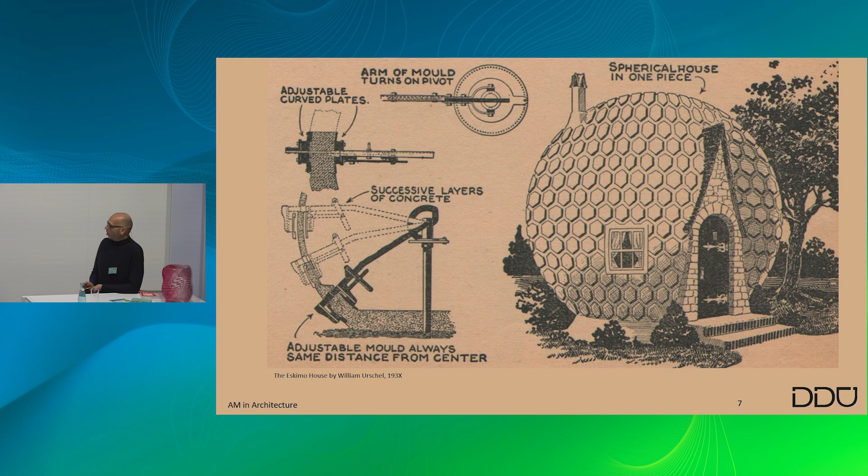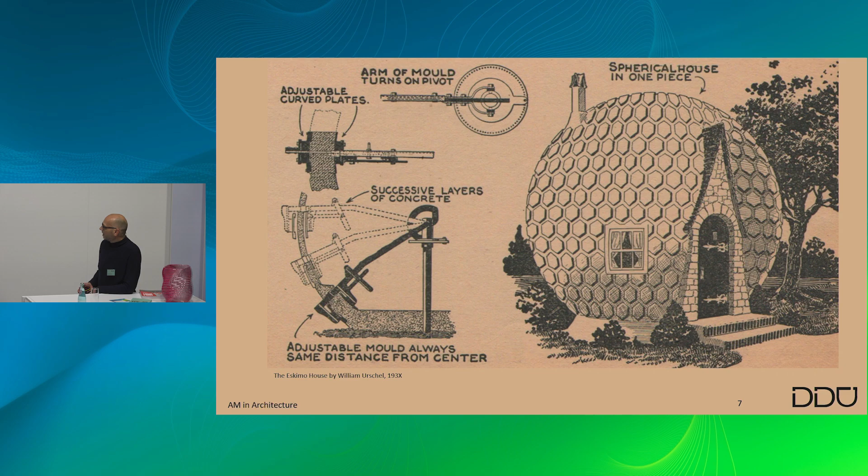If we think about 3D printing, it mostly appears to be a completely new topic, but you find precedents already in the 1930s. William Urschel suggested printing what he calls an Eskimo house with a 3D printing method, and they actually prototyped that. There's a bit of manual labor involved here, as you can see, but the process reminds of current technologies in the built environment.

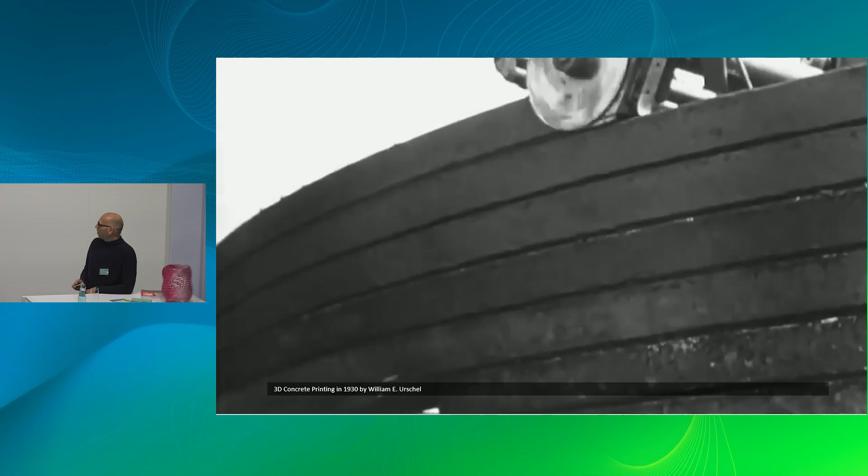It didn't take off in the 1930s, and it didn't take off in the 1990s when Behrokh Khoshnevis filed his first patent on what he calls contour crafting. When I saw these images, I thought: building a 3D printer that is larger than the house you want to print—does that really make so much sense? We will see that it actually happens these days.

It didn't happen in the 1990s, it didn't happen in the early 2000s, and in our book we explore why it happens now. We use this slightly cheesy quote from Victor Hugo: 'You cannot resist an idea whose time has come.' What we mean is that turning ideas into successful and maybe even disruptive technologies is an extremely context-sensitive process. So place, time, resources, and parallel innovation in adjacent fields need to fall together to ignite such an innovation. If we look at additive manufacturing and architecture, it's the digital design, the 3D modeling, the parametric modeling that needs to come first.

So instead of drawing buildings, you 3D model them. This is then, in a digital process chain, transformed into the movement data, into the G-code for the printer. So there's a digital continuity from ideation to fabrication. You need to have the machines, and for large-scale elements in architecture, you need robots to increase the reach for building large-scale elements, and you also need innovation in material.

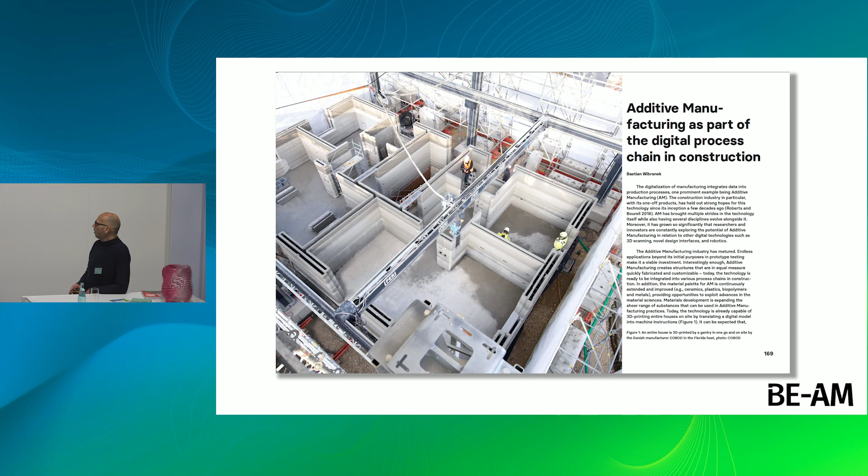If you look at this gantry system, it's not such a big technical infrastructure to make it happen. What's the result? A very conventional multifamily house. So we could now discuss what else is possible if we 3D print architecture, but this was not the question for this project.

Here, Peri asked: what happens if we 3D print a house? Do we get permission from the authorities to print it? Can we interface the 3D print with all the other elements that need to go into a building, like a window, like the plumbing, electricity? This is what they explored in this project successfully.

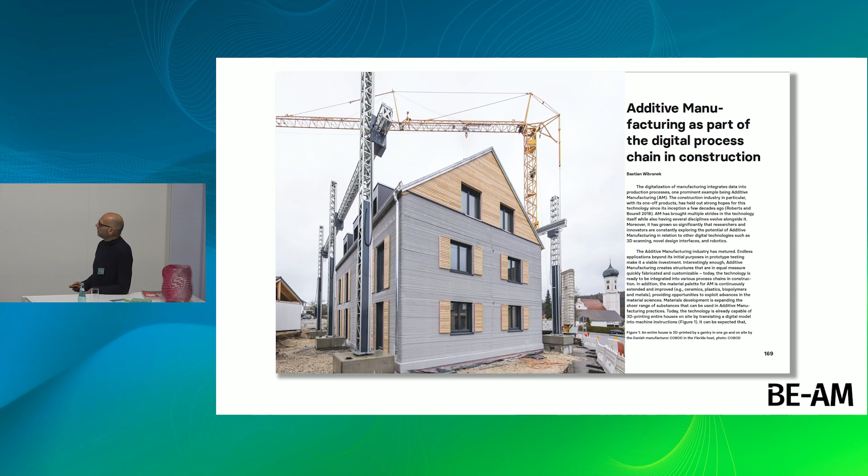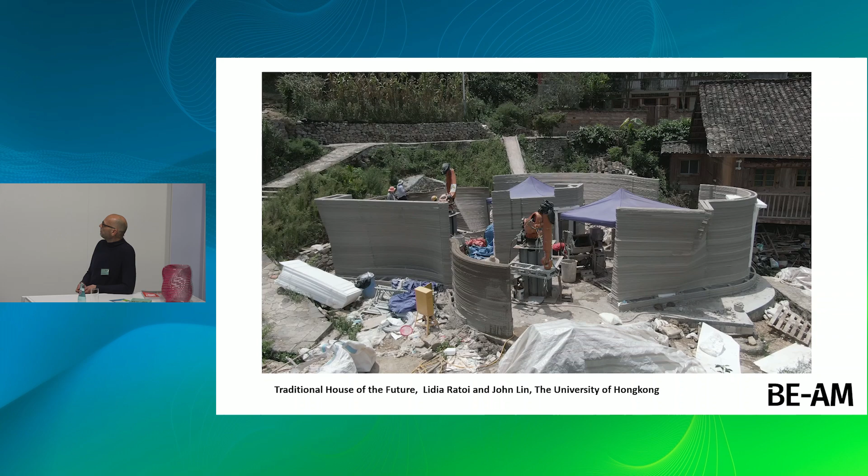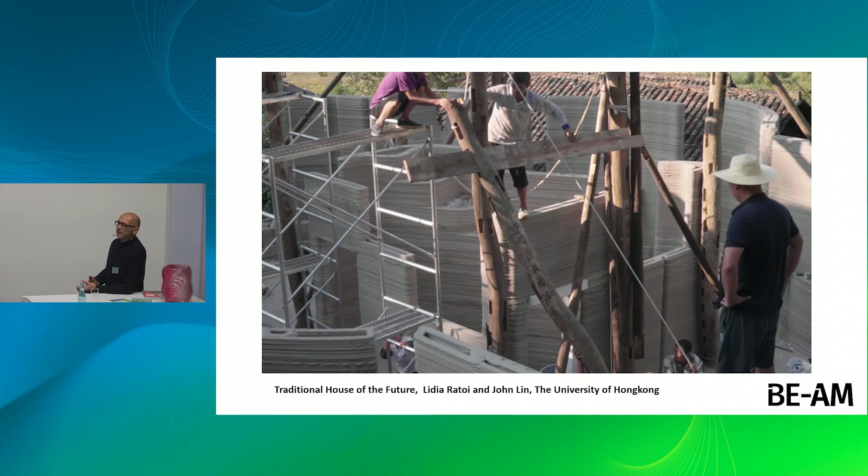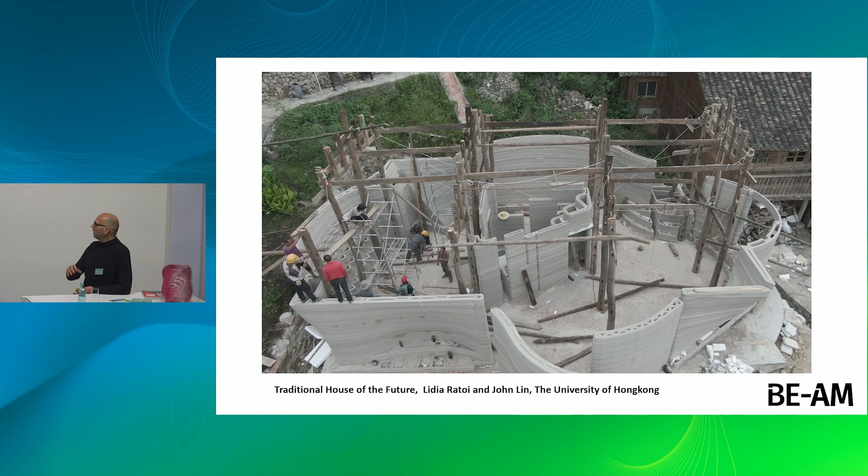There are other approaches that use 3D printing to explore the interaction with the built environment and context. This project is by the University of Hong Kong, presented by Lidia Ratoi at last year's BE-AM Symposium, and John Lin. They disassembled an existing wooden barn, then 3D printed a new structure, creating new spaces printed around the existing structure. Once the print was done, they re-erected the wooden structure so the new combines with the old, showing the strength of bespoke, geometrically precise elements that combine what is there with what could happen in the future.

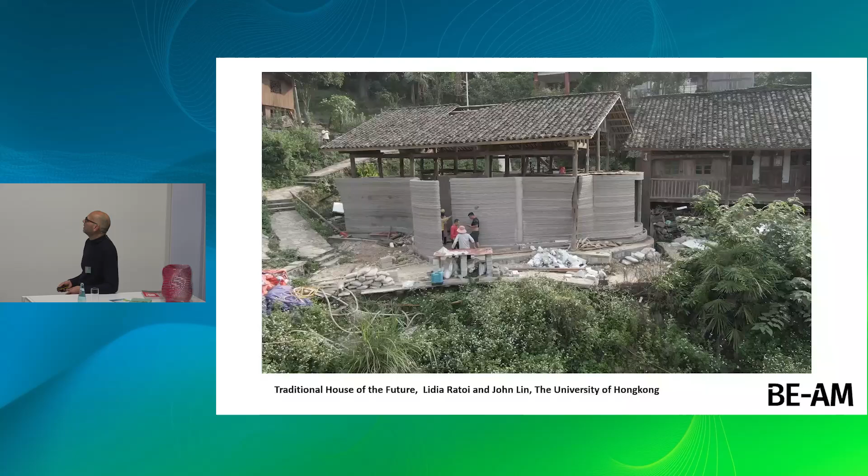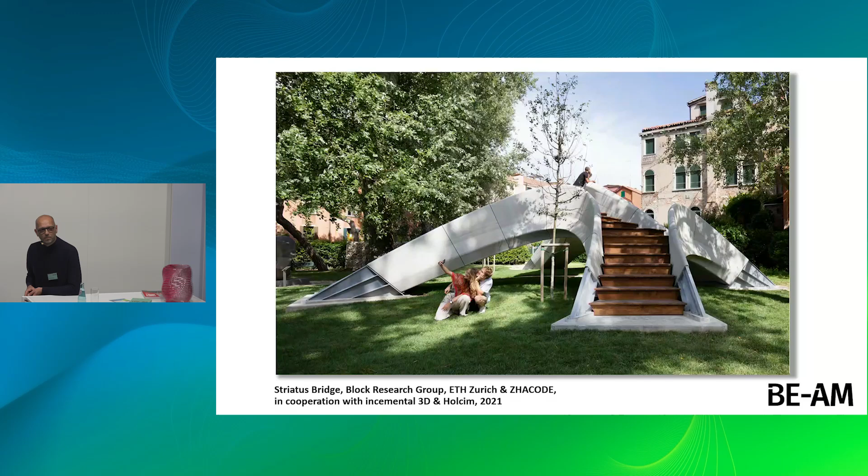If you 3D print with concrete, you always face the challenge that when the element is exposed to tension or bending forces, you need steel reinforcement, and it's not easy to integrate that into the 3D printing process. So the team around Philippe Block from the Block Research Group came up with a design proposal for a modular bridge with a shape that leads to pure compression forces in the system. With only compression, concrete is fantastic. So the limitations from the process and material become a design driver for what could be a bridge and also a very beautiful sculpture.

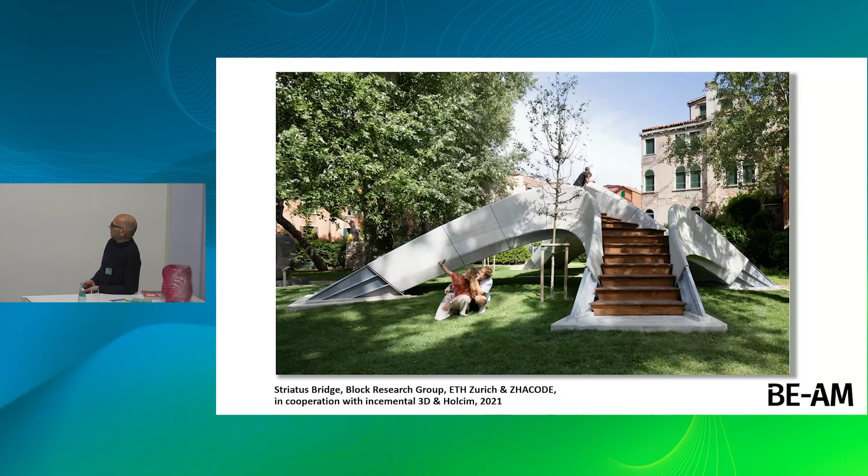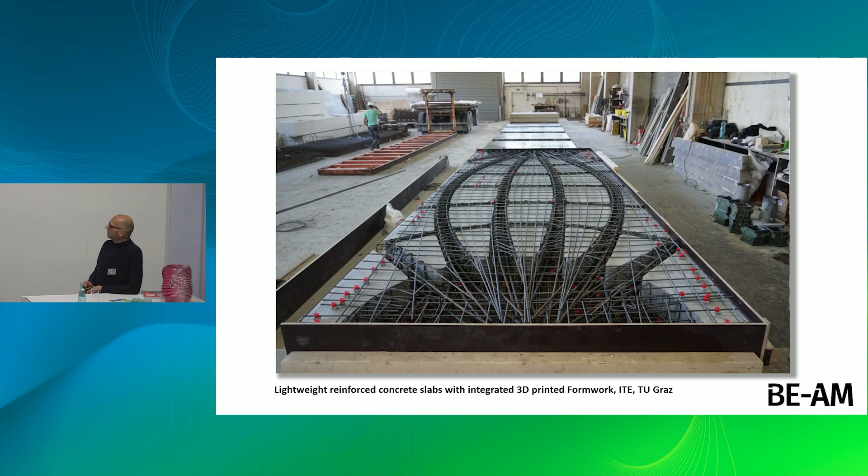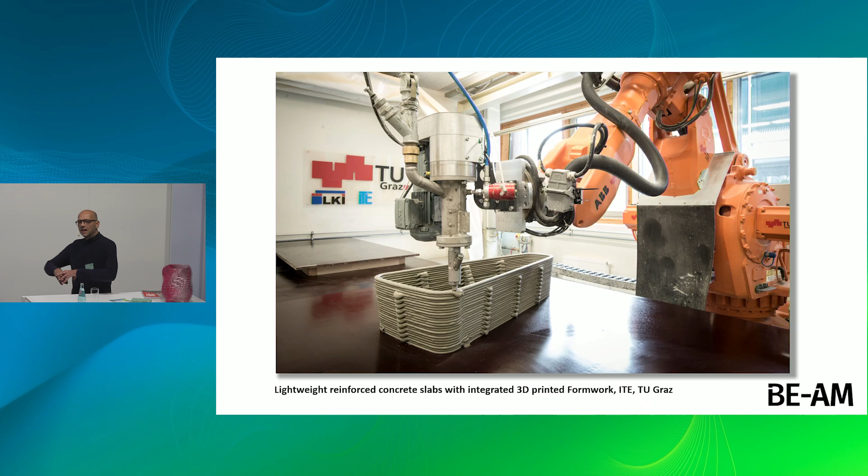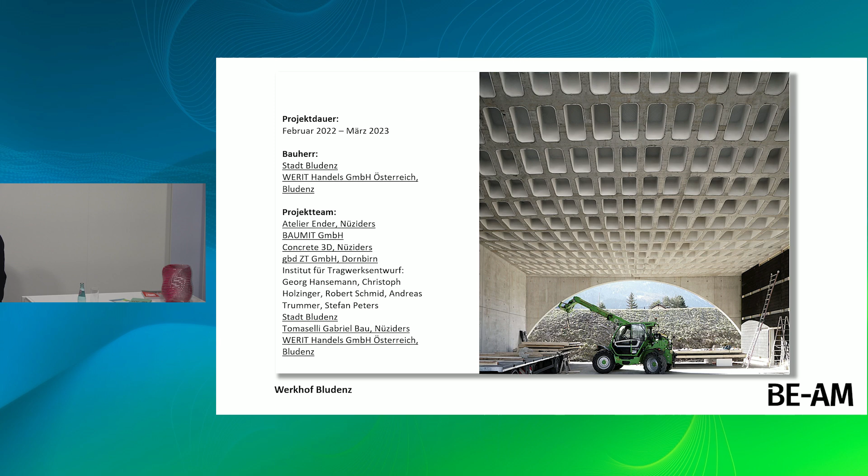If you want to integrate reinforcement, there are other ways to use 3D printing. Here we look at a floor slab. Under production, you see steel along the trajectories with high tension forces, and below the steel are 3D printed cassettes made from concrete, developed at TU Graz, acting as a void between the parts that are then cast in concrete. Looking at the floor slab from underneath, you see conventionally cast concrete in the rib structure, and these 3D printed cassettes. It looks interesting and beautiful, but it also saves up to 35% of concrete because material is left out where it's not needed to make a structurally sound, spanning floor slab.

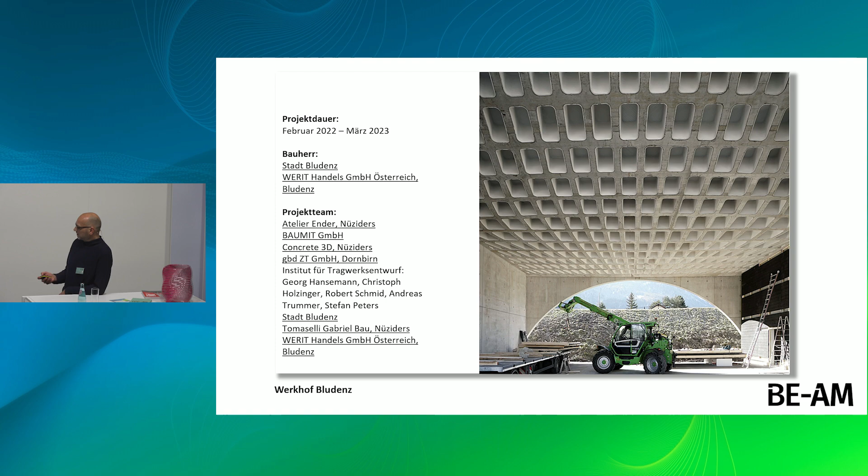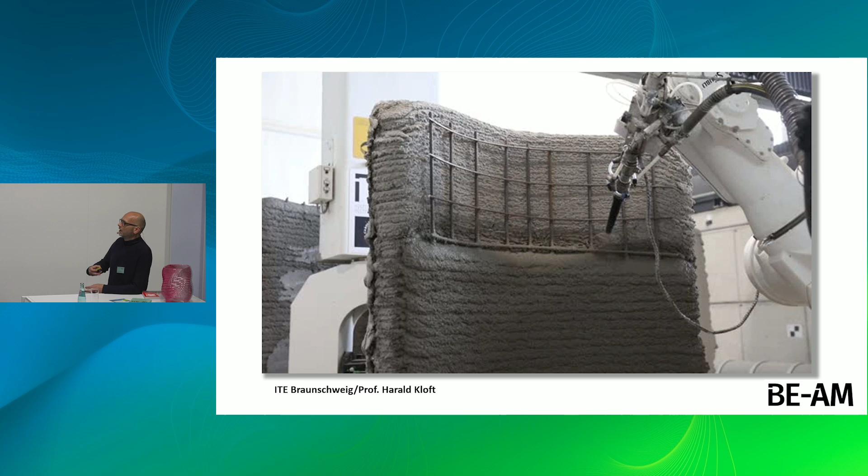This is research done by Professor Harald Kloft at TU Braunschweig, using a well-known technology called shotcrete, where you shoot the concrete. They take a nozzle, connect it to a robot, and shotcrete to build building elements, like this column. Harald Kloft, in German, presents this technology as Drucken mit Druck, printing with pressure. What's interesting is that you can now interface a 3D print with pre-installed steel reinforcements, one possible way to solve the challenge of reinforcing 3D printed structures.

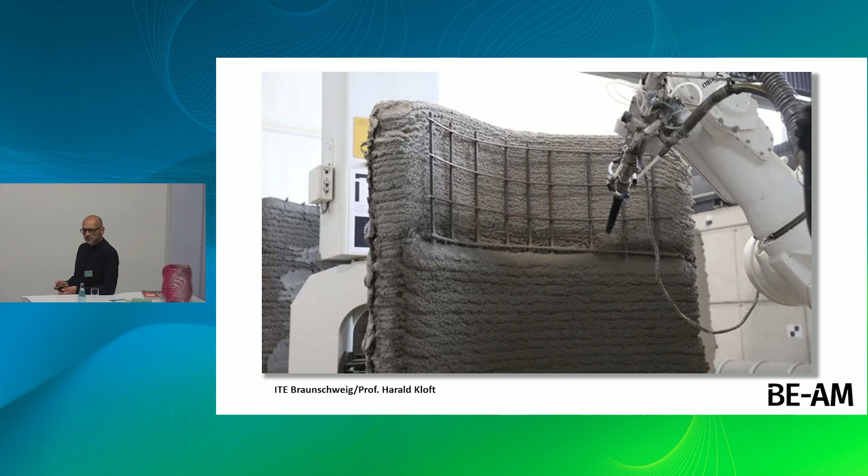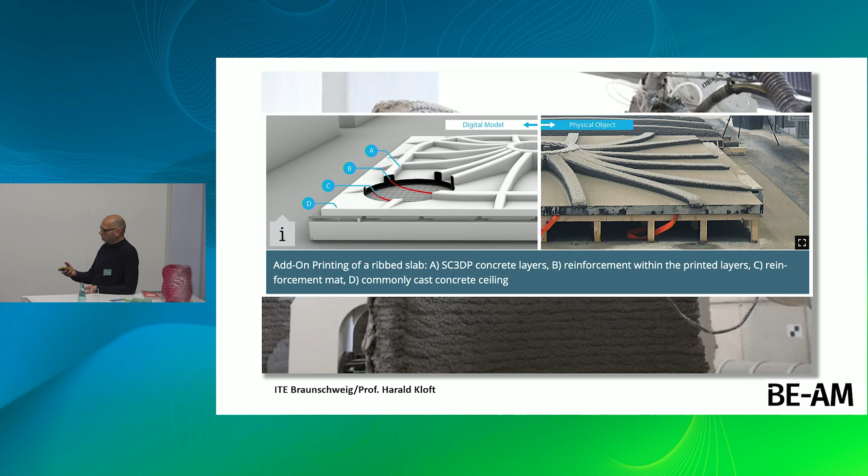The team tries to develop hybrid methods where you use a regular fabricated, very thin floor slab, an efficient way to do that. If you need additional elements to take extra loads, you might 3D print ribs on top of these standard building elements.

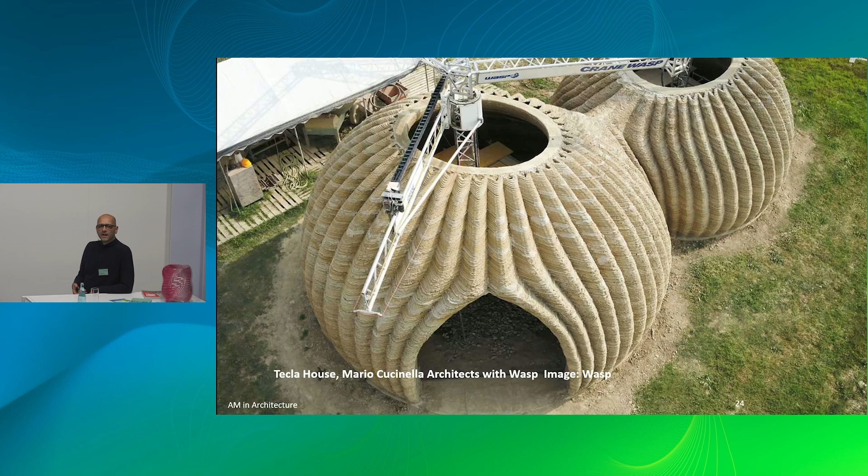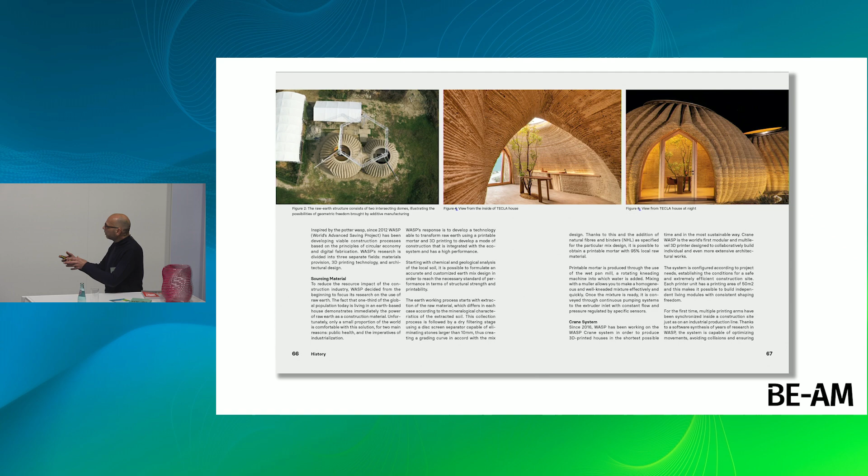But concrete is very CO2 intensive, so ideally we get rid of the material and use more alternative materials in architecture. The company WASP has their own booth in Hall 12 and an exhibition piece here in Hall 11. They explore using local earth to print buildings, printing what they call the Tecla house using clay. Clay is weak in bending and tension, so the architects had to design a compression-only structure that actually looks a bit like a cactus. Going back one image, they explore new technologies and local materials, but also the spatial qualities that emerge from these funny little shell shapes.

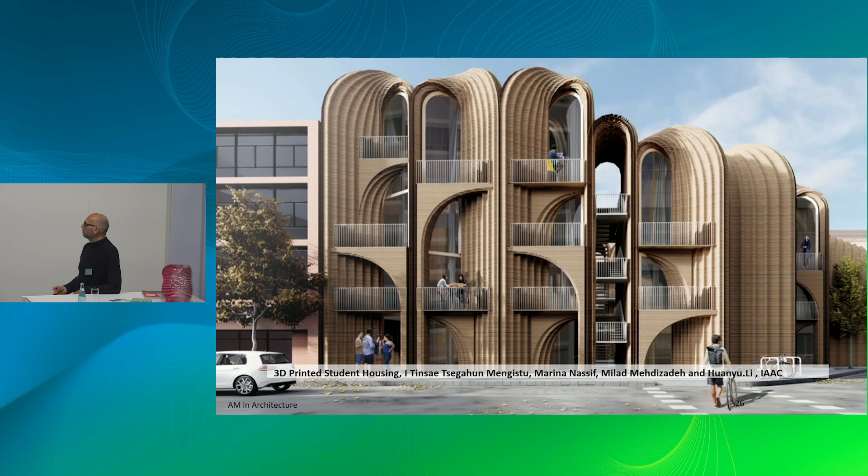WASP works a lot with an architecture school in Barcelona, the IAAC, where students learn the limitations and the potential of the material and process, then speculate what that could mean for architectural design. I think that's a rewarding approach: first know your limits, then explore what's possible within them. Beyond pavilions or cactus-like buildings, they develop solutions for the city, like this multi-story clay-printed building, where the shapes respond to the needs of the material and the process.

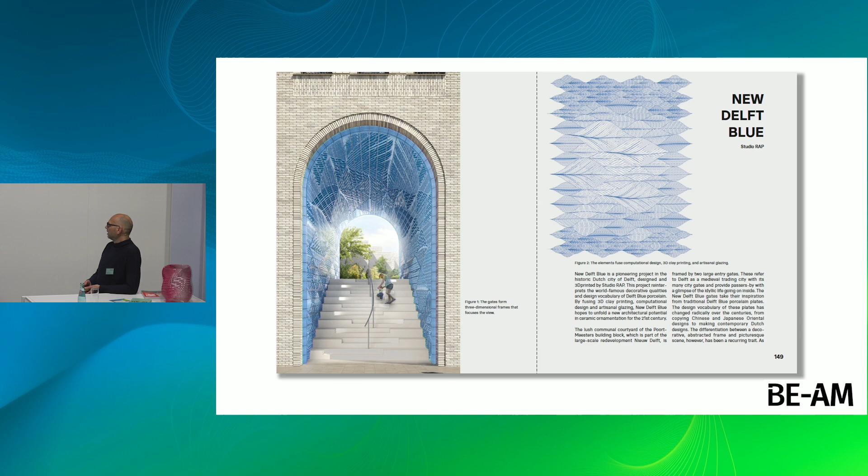You can, of course, fire clay and glaze it. This is what Studio RAP did for a project in the Netherlands. They 3D printed three-dimensional tiles, which they then glazed, and with this glazing layer, you get a very resistant tile that can be used as a facade system.

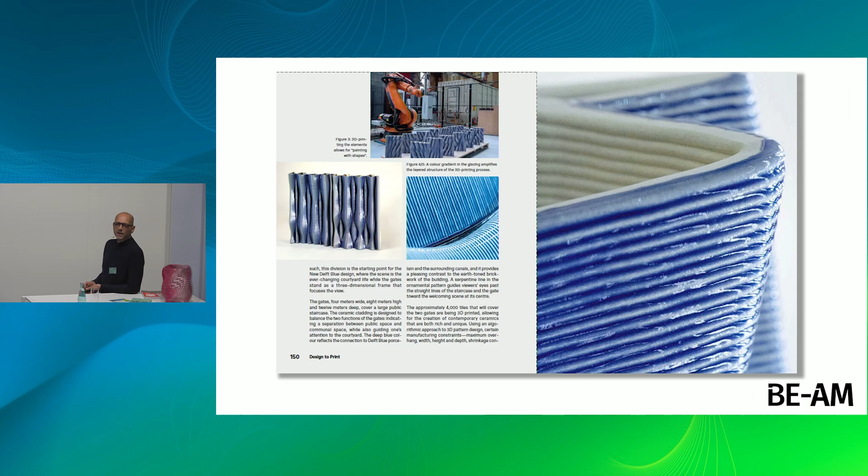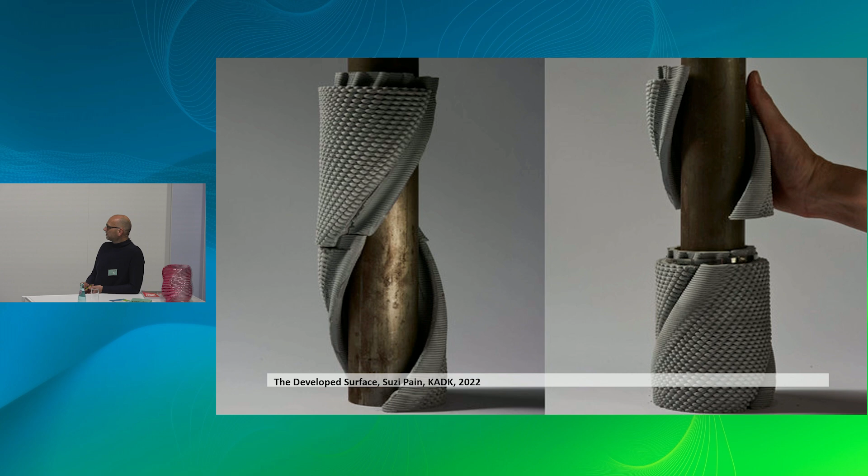Suzi Pain from the Royal Academy in Copenhagen explored 3D printed clay as a kind of ornamental enclosure for steel elements, but they come with a second use: they could work as fire protection for steel elements and buildings. She's very much inspired by Baroque, giving this Baroque inspiration a new expression through 3D printed clay.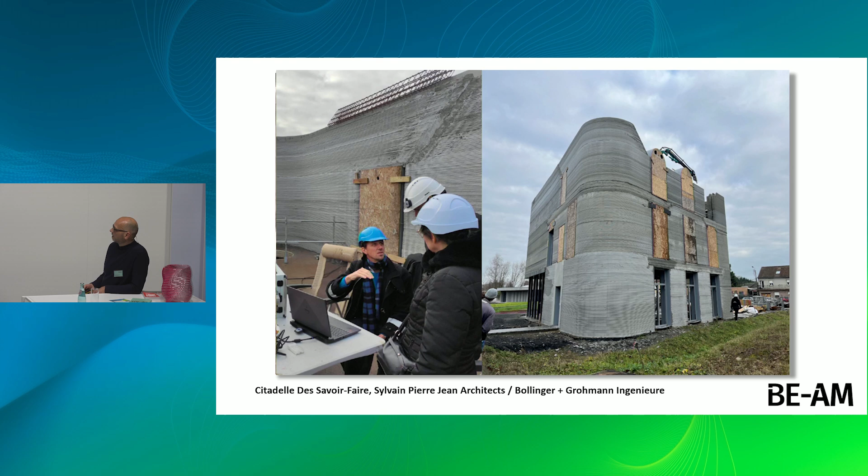This is one under construction that Klaas De Rycke from Bollinger Grohmann Ingenieure will present tomorrow. This is just one building of quite a few that will be built here in this U-shape configuration. And we see one other detail when we look at this plan.

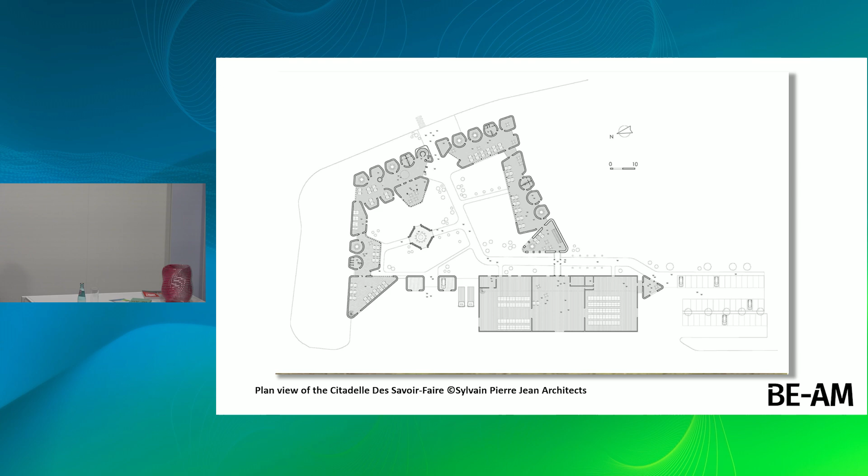3D printing is used for those parts that are complex in geometry, and then there are other parts of the building complex that are built in a more conventional way.

And this is something which is very necessary to make AM an established technology in architecture: to identify where we have benefits from it in the fabrication and in the building.

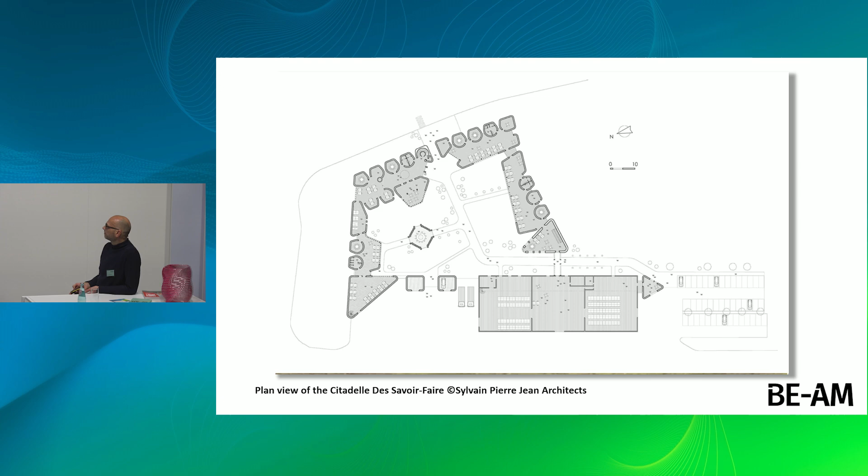AM is scaling up, and if you go to the ground floor, you will see one of these columns that forms this Tor Alva, designed by Benjamin Dillenburger and Michael Hansmeyer. It is currently under construction.

It's a weird kind of building that is also a research project, but a research project, of course, in one-to-one scale.

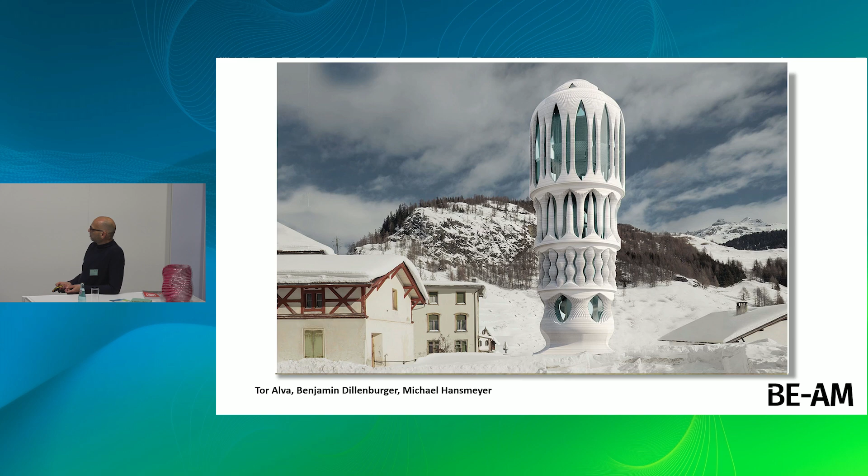It explores not only technology, but also new formal expressions that are possible through 3D printing. You see, it is under construction now, and you get an idea of the scale of this tower.

And we have Urban Reef in Rotterdam, and they look at questions of cohabitation.

We all talk about climate change. The extinction of species is a challenge that is at least as big as climate change. And Urban Reef is proposing to create habitats for animals in the city.

And they are even proposing to include the seeds of plants in the 3D printed clay, so that maybe construction and plants are kind of merging together here.

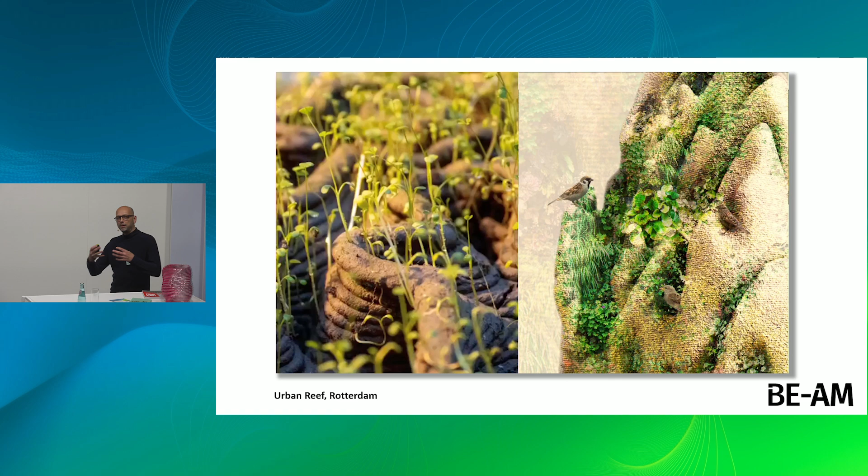What are we doing in Darmstadt? We are currently exploring this.

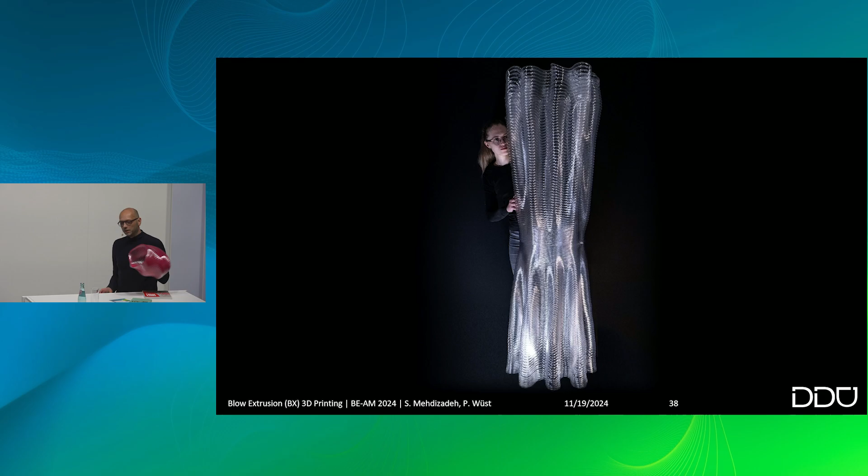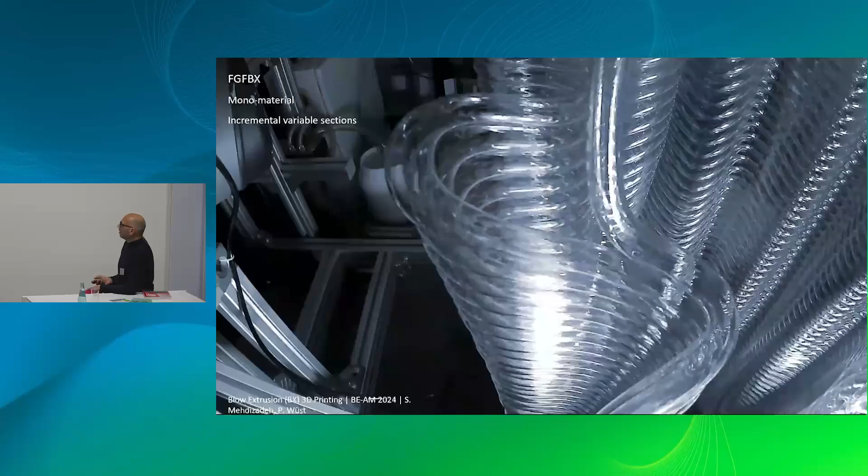This is a piece of lightweight 3D printing, where it's not a solid filament that is extruded here, but actually a tube, so it's hollow. And with this hollowness, we are able to create stable but very lightweight elements.

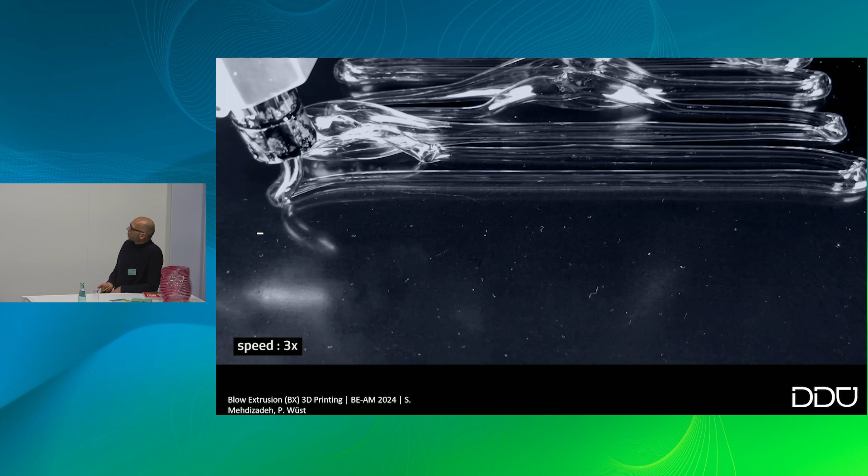We are currently working on changing the air pressure within the extrusion nozzle to allow for a change of cross-section of these 3D printed profiles.

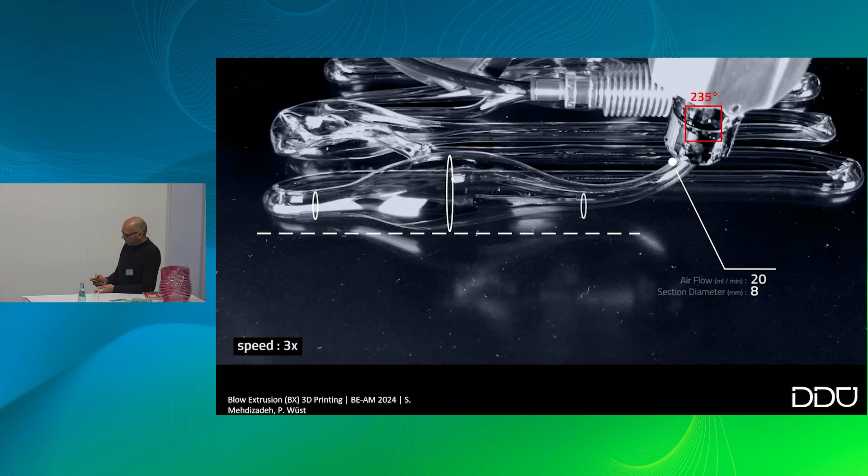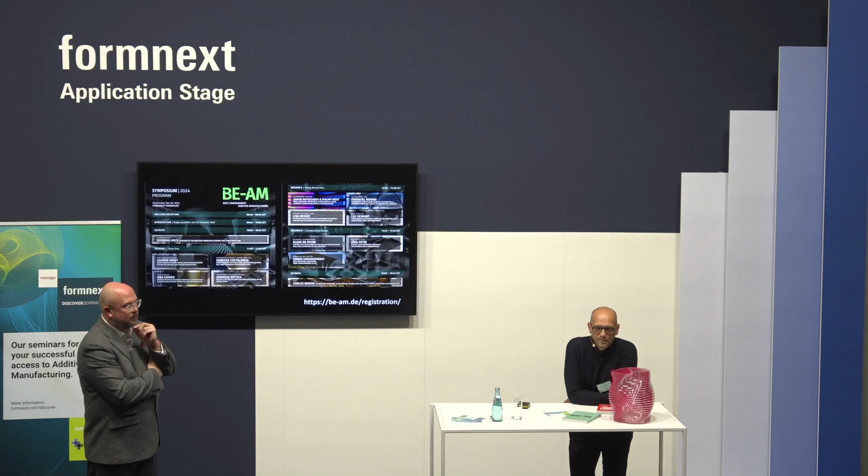Houses from Lehm, from straw, from Ziegel, from green beton, made by this production. Could you imagine such a model project, and who would make a feasibility study and maybe invest? Thank you very much.

Sustainable everything. That's a very large question, and I'm not sure if we can answer it by looking merely at the technology. But I think what's interesting is that there was a strong interest in clay and straw buildings in the 1970s.

There's great work being done at the university in Kassel. And we kind of lost that, and it's reviving now through digital technologies, which is surprising.

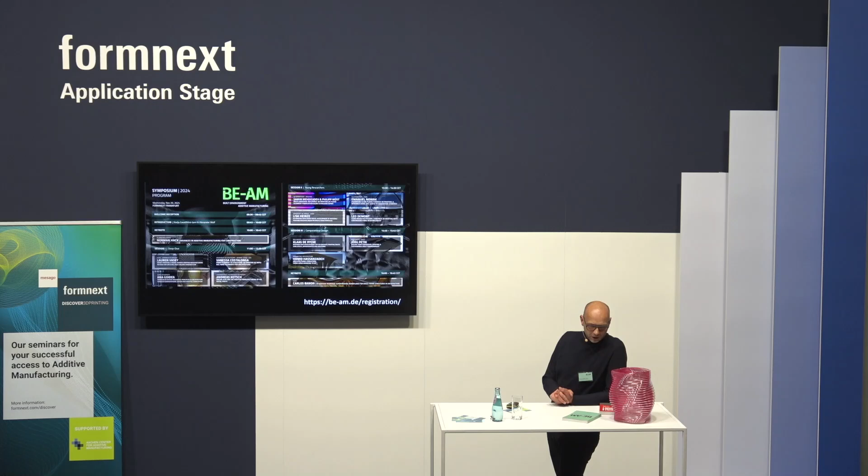But it happens. If you see the work of WASP in Italy, there's really the ambition to take local materials, to not drive something for hundreds of kilometers, so you save a lot of CO2. You need to make sure that your machines work with this local earth.

So this is happening. If you ask me who invests in that, I'm not a business person, so maybe you find people here that are interested in that.